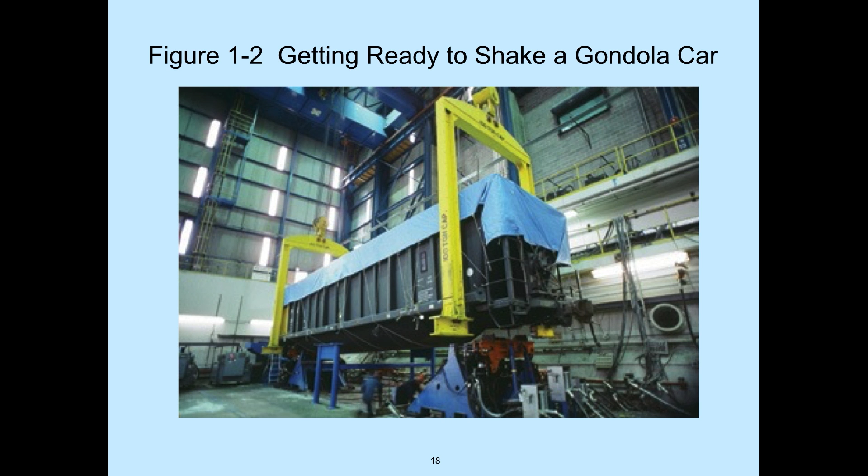So eventually we got away from steam and went to diesel. We didn't have to stop for watering. Much higher velocities, much better ratio of force to mass as locomotives went to diesel electrics. Here we see a test lab. People are simulating on rolling equipment what that rolling equipment would eventually experience on the track.

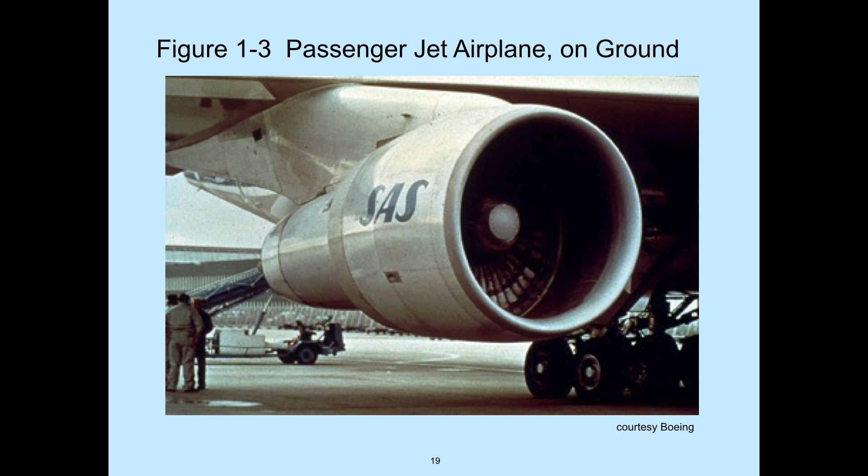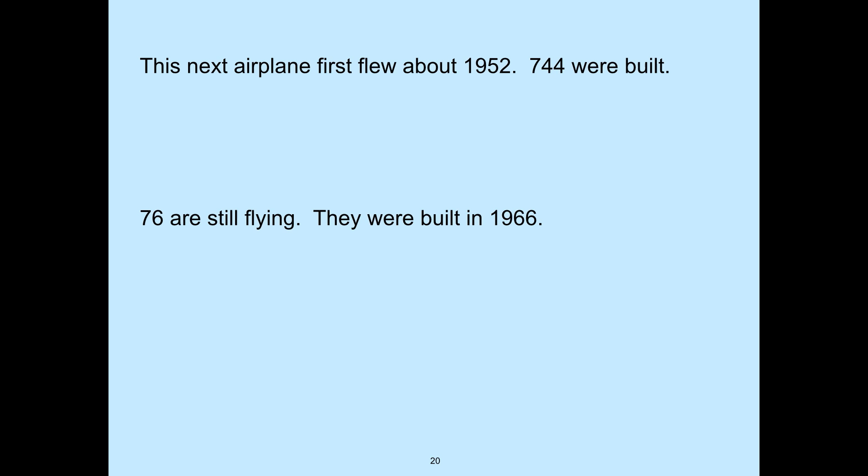But the real interest in vibration came with the air age. Aircraft vibrations are very definitely of concern. This next airplane that I'm going to show you first flew about 1952, and 744 of them were built. 76 of them are still flying, and those were built about 1966. And my first vibration experience was on B-52 aircraft, full-scale models of that aircraft.

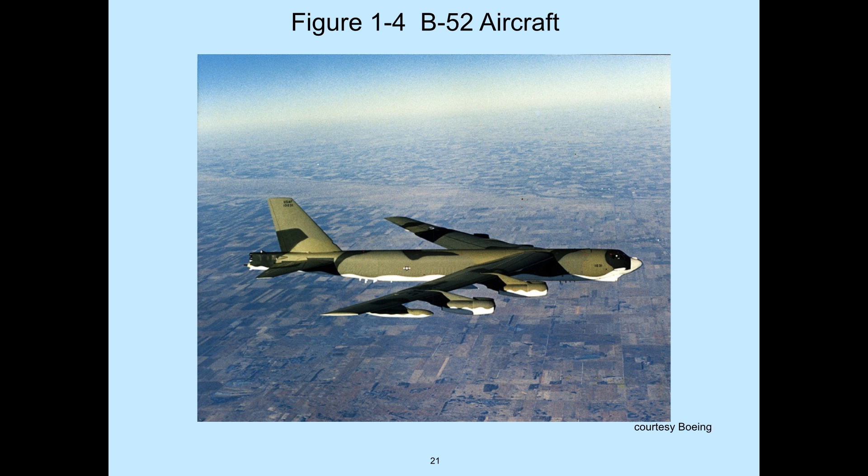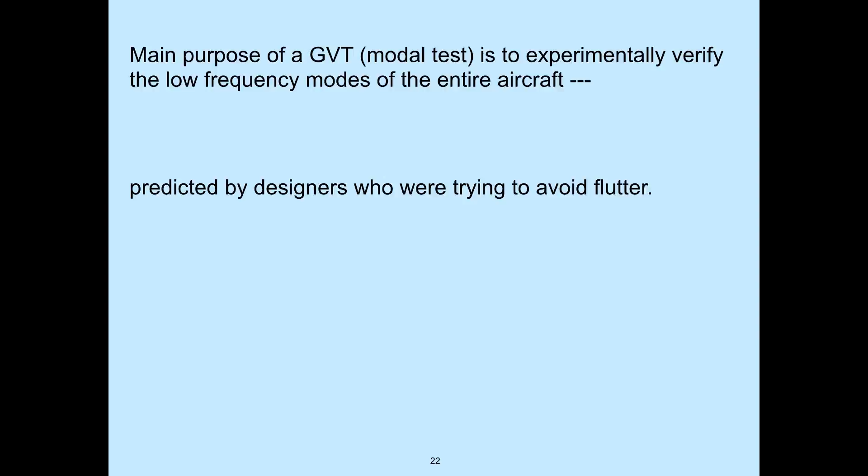We were doing what are called modal tests that we're going to discuss later. The main purpose of that kind of a test was to experimentally verify the natural frequencies that the designers had predicted. Their concern was flutter. They wanted to avoid in-flight flutter. There is currently concern about the switch of aircraft construction from metals to plastics.

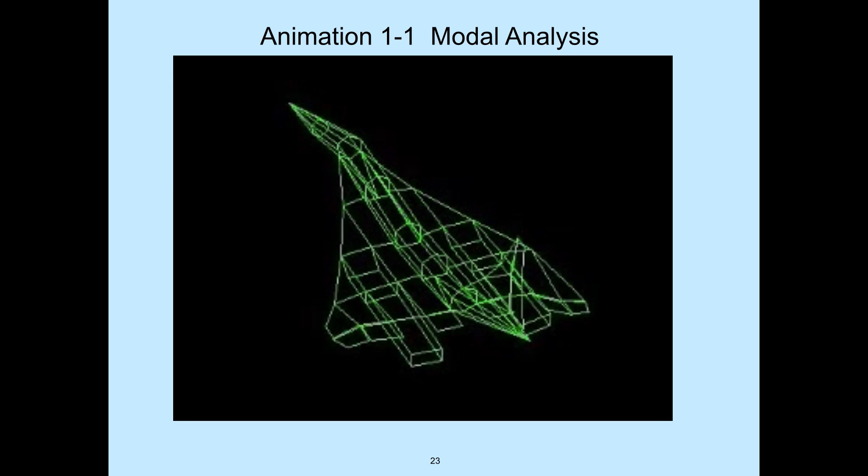And here is an animation of a particular mode, greatly exaggerated. You'll never see anything like this on a real aircraft. The only mode you're likely to ever see as a passenger might be looking out at the wing tips and seeing them move a little bit relative to the body. So this is hugely exaggerated, one of many modes that we're going to look at over the next few hours.

Have any of you ever flown in a helicopter? You've experienced vibration. They definitely shake. The main source is the main rotor blades passing over the cabin. Two rotors, more vibration. Any propeller-driven vehicle, aircraft or ship, is going to generate vibration. And that vibration is something we don't particularly want.

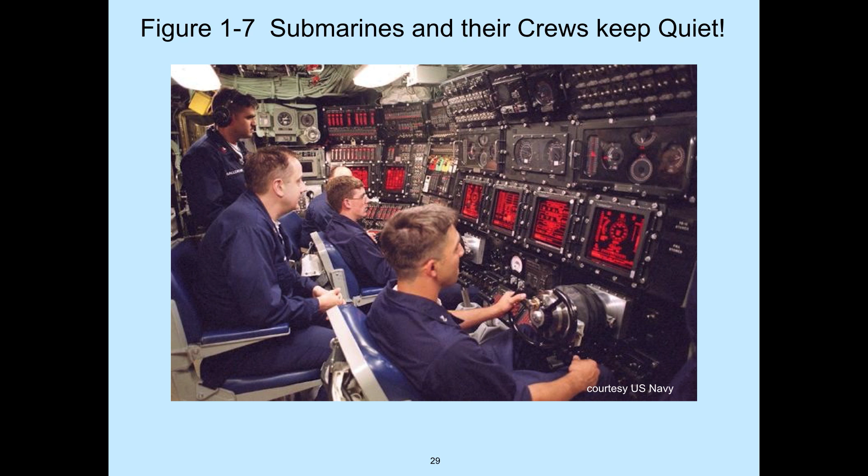It becomes sound, travels through the water, gives away our location, our identity, our speed, and so forth. Especially we're concerned about that if we're the crew of a submarine and the enemy has lowered a sensor to listen to us and identify us. In those circumstances, we want to reduce vibration if we can. Vibrations are measured with accelerometers, which we didn't have at the time I got into this vibration business.

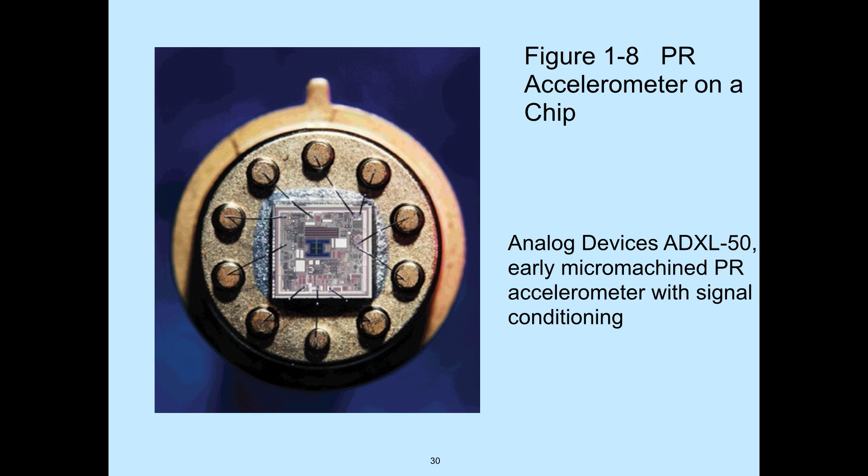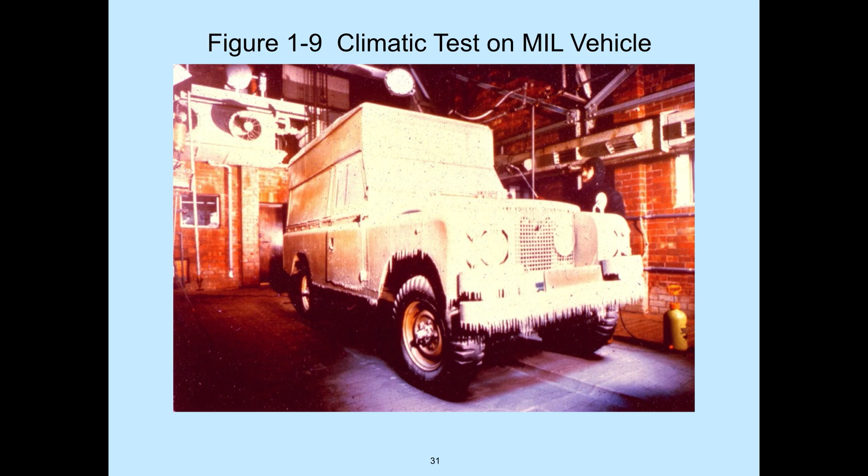I want to say just a few words about climatic environmental testing. It wasn't necessary to take this vehicle to the North Pole to find out if it would survive. Instead, they put it into a chamber and pulled the temperature way down. And that sort of climatic environmental testing is done on equipment. Our focus, however, is going to be on dynamic environmental testing, vibration and shock.

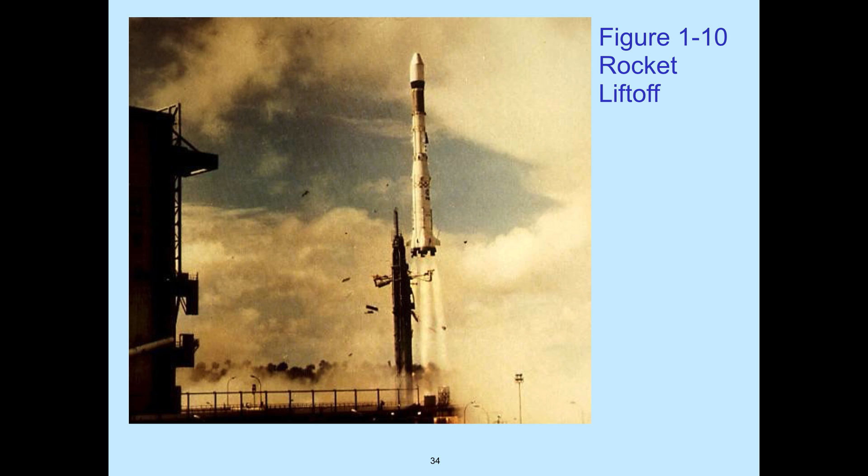At one time, 2 or 3 pieces of hardware were built, one or two for testing and one for flight. But in recent years, in an effort toward economy, they sometimes only build one. And they hand that one piece of hardware to the lab and say, here, test it. But don't break it because we have to fly it next week. Well, that inhibits our testing somewhat.

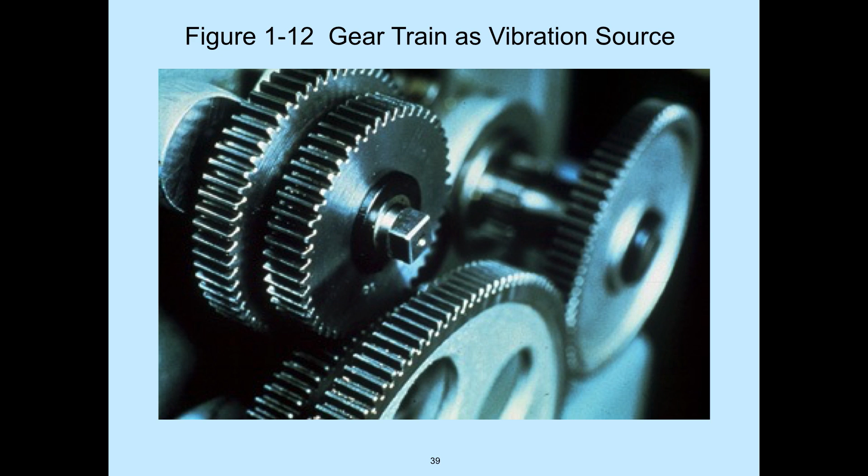Hardware that goes to the military is often used in very strenuous circumstances. It has to be rugged to withstand this kind of an environment. And our hardware, I think you can imagine, can find many ways to fail. And we're going to identify those. One of the sources of vibration on that vehicle might be gear trains.

Each gear turning at a particular speed, and the frequency of that gear's contribution is that RPM multiplied by the number of teeth on the gear.

Some propulsion machine, some sort of an engine firing, is going to create vibration felt throughout the vehicle.

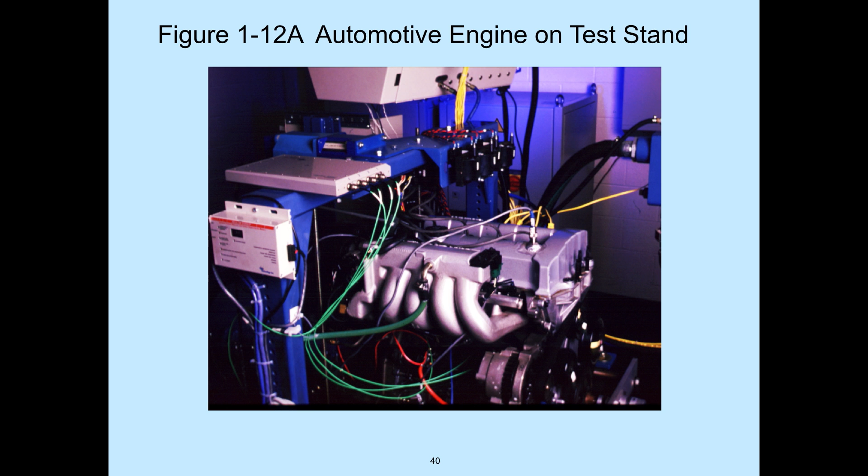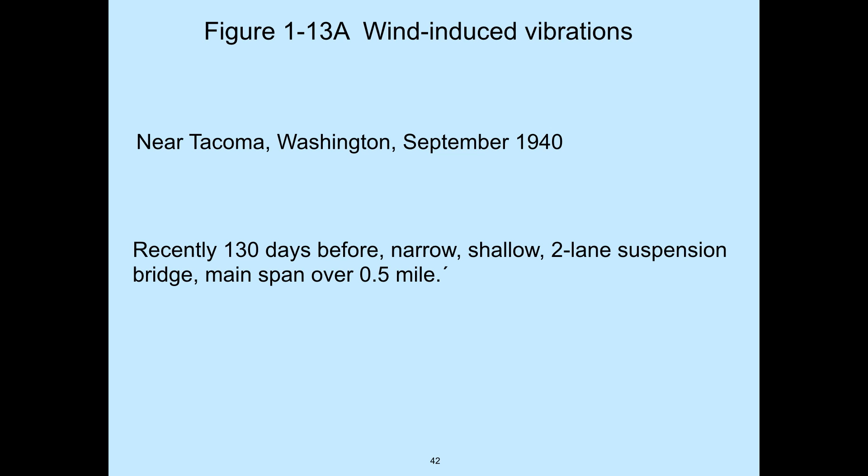Have any of you experienced wind-induced vibration? If you happen to have a sailboat, then you definitely have felt vibration of the hull and the rigging and the sails themselves.

I mentioned wind-induced vibration because in September 1940, near Tacoma, Washington, the Tacoma Narrows Bridge experienced damaging vibration. This video coming up is a classic that civil and structural engineers all study. There we see a distance shot of that bridge flexing in the wind.

It took several hours of a steady wind blowing to come up to that intensity of response. Definite resonant behavior.

I'm guessing, Brett and my audience, that you have some interest in drilling into the earth, drilling for oil, drilling for water. Well, that drilling action, especially through rock, creates vibration. And in certain instances where the smart drill bit is sending information up to the surface, that vibration can be detrimental to that smart drill bit.

So drill bits are vibration tested. Another form of vibration is seismic, earthquakes. A very damaging earthquake took place in the Northridge area of Los Angeles in January 1994.

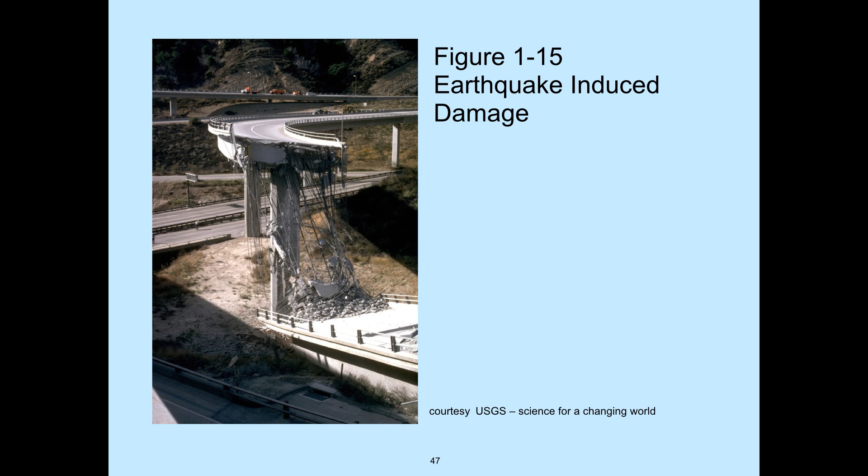This is Interstate Highway 5 near Los Angeles, the bridge over that interstate. Interestingly, the previous bridge had failed at the same location in an earlier earthquake. We're not real sure about the bridge that's there now.

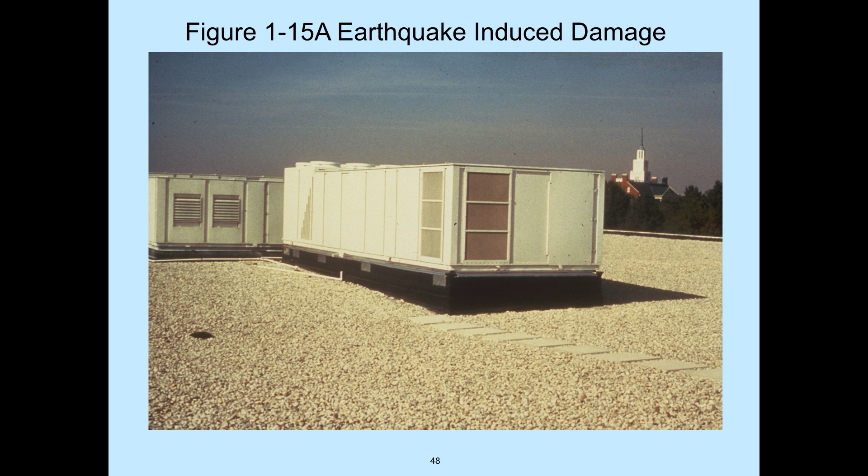Will it survive an earthquake? We don't know for sure until that happens. But there are some seismic vibration tests that are done on equipment to reassure ourselves that our equipment will survive. We're not sure whether this equipment will survive the next earthquake or not until that earthquake happens. But failures do take place, and we are going to talk about seismic vibration testing.

I imagine that each of you has experimented with a paper clip, has bent it back and forth and counted the number of cycles to failure. And then conceivably, you made a stress riser in the wire on another paper clip, and it took fewer cycles to get a failure.

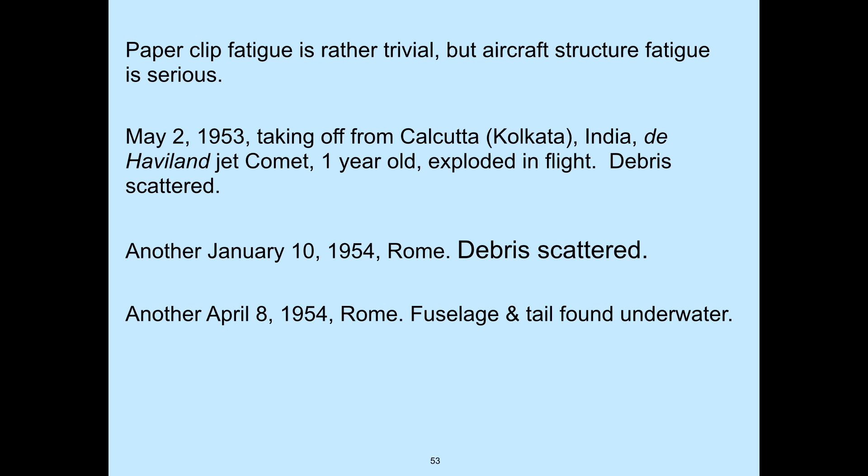Those paperclip fatigue failures were rather trivial compared to some de Havilland aircraft that took off from Calcutta in 1953. One, and then another one from Rome. And in these, the debris was scattered. But a third one took place, and they were able to find the tail and the fuselage underwater. And they discovered that the cabin had exploded.

Now, de Havilland designers had worried about cabin pressurization. They were designed for maybe 20 pounds per square inch. And the labs had performed static tests out to 16.5 psi on every aircraft.

But after those 3 disasters, then they did some cyclic pressure tests, and they found a corner of a cabin window cracked, and the crack spread rapidly. That failure led to reinforcing that area on future aircraft, starting with Comet 4.

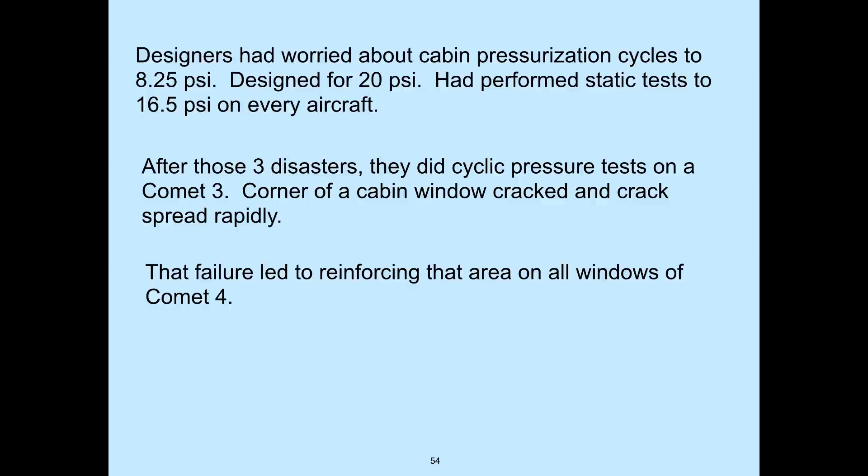That aircraft had had over 75,000 pressure cycles, takeoffs and landings, very short flights among the islands in Hawaii. And the investigators looking at that aircraft found corrosion. They found epoxy had debonded.

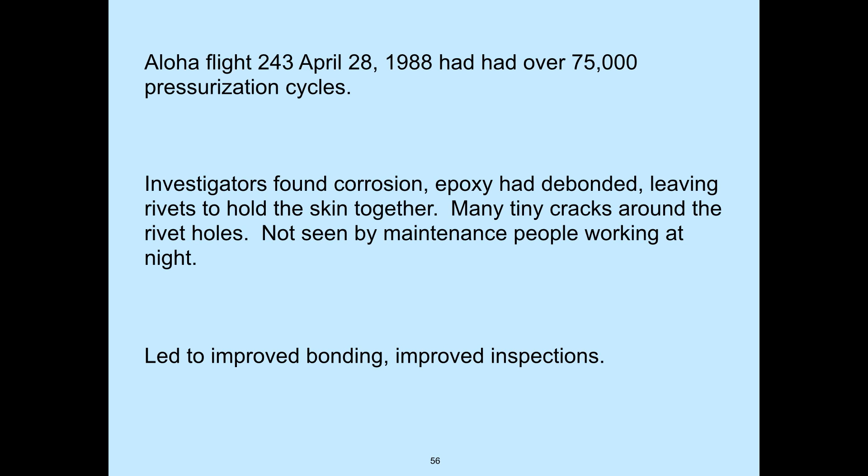These troubles hadn't been seen by maintenance personnel working at night with flashlights. But this led to improved bonding and improved inspections. Currently, a number of aircraft are wearing out and should be replaced.

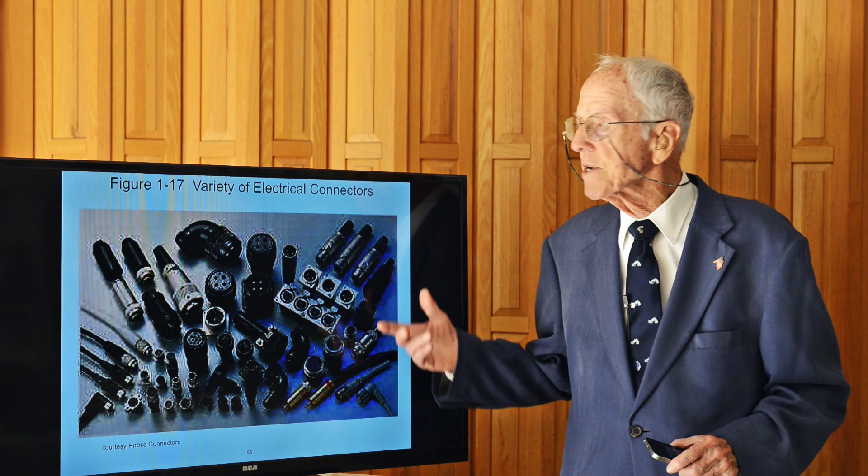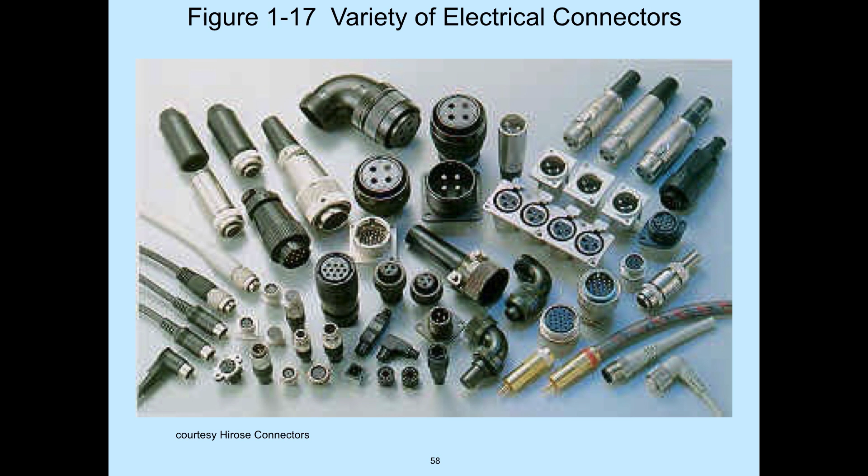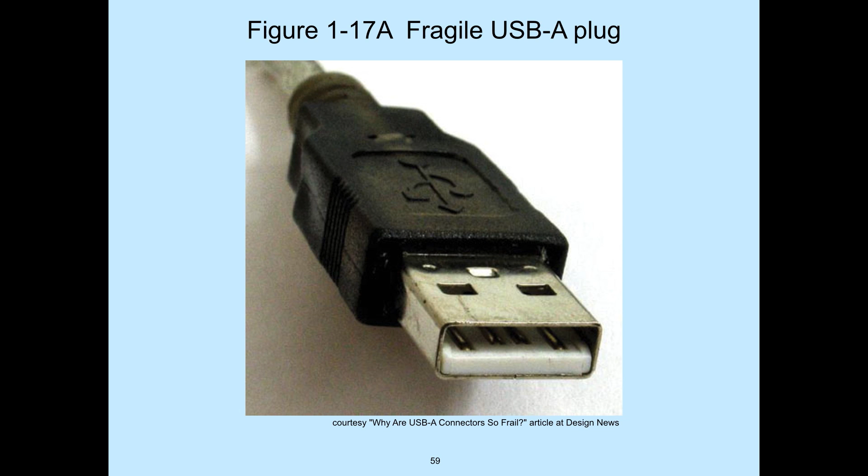Let's change the subject and talk about electrical connectors. They're supposed to be zero resistance, 100% conductivity, and they are, but under vibration sometimes they open momentarily, and that opening can badly affect downstream electronics. So we are concerned about those, and we do vibration tests on connectors using a shaker and electronics monitoring of circuitry. We've found that these USB connectors are very intermittent.

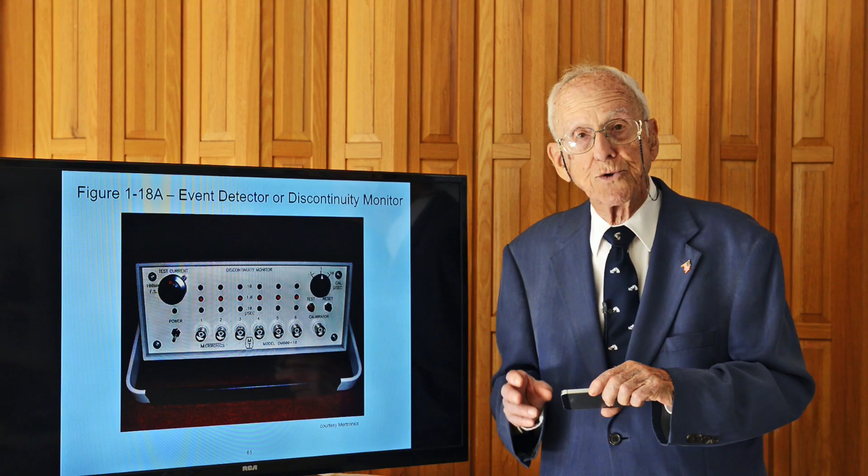We have military-type connectors that can stand up under vibration inputs. There are standards for such tests, and electronic devices for monitoring the contacts to make sure they don't open. If they do open, it is recorded.

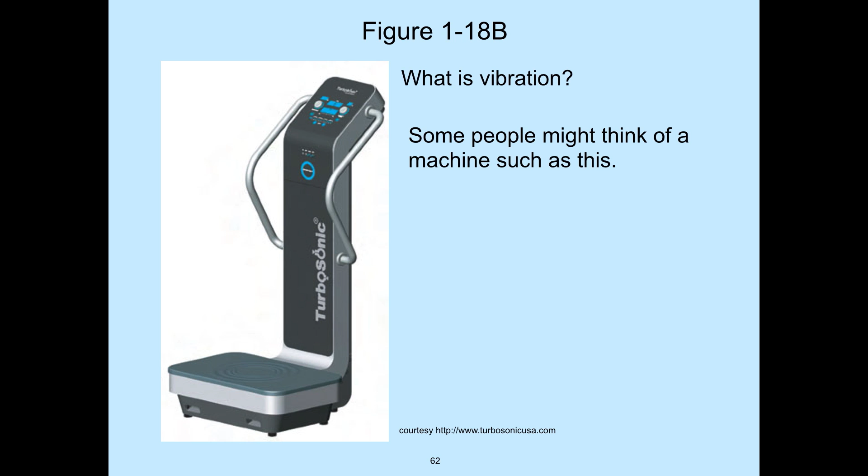What is vibration? It's kind of hard to describe, but referring to your gymnasium and machinery like that, almost everybody understands what you're talking about. Webster gives us a definition, one line of which is useful: this periodic motion of the particles of an elastic body and so forth. That's a good definition for some of our work—okay when we're talking about sinusoidal vibration, but it doesn't fit when we're talking about random vibration, an important subject for these few hours together.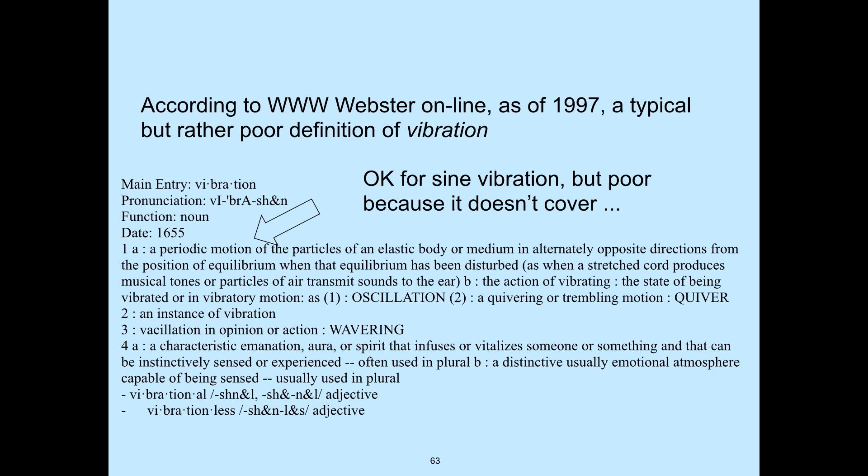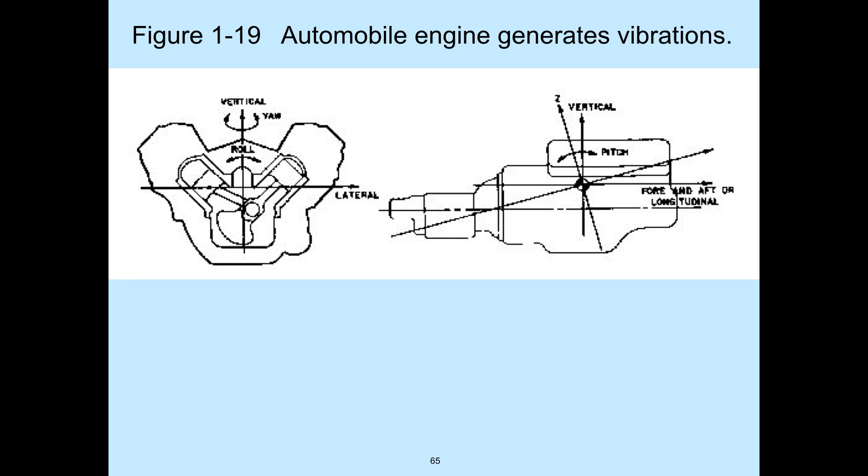Let's imagine that this automobile in which we're riding has been instrumented. Three accelerometers have been placed on the suspension, and they're recording vibration as we go along. What do those records look like? We'll examine them in a minute. But part of the vibration they're recording is from the engine and the drivetrain. That dictionary definition applies to this contribution, but it doesn't apply very well to the road inputs.

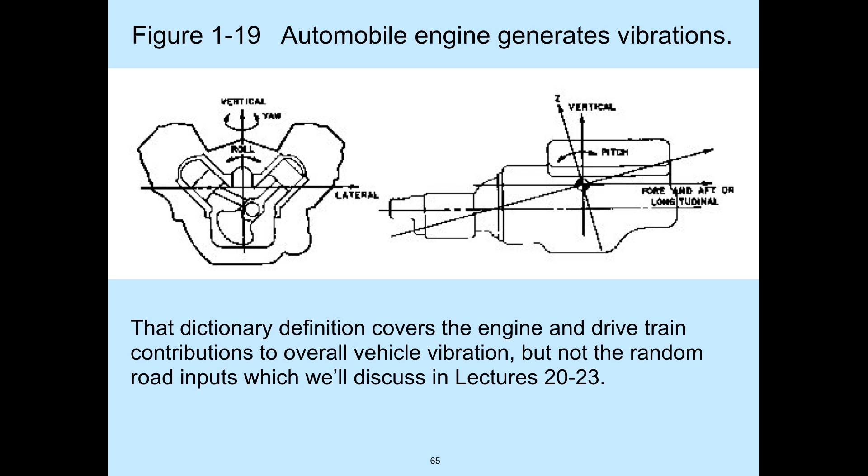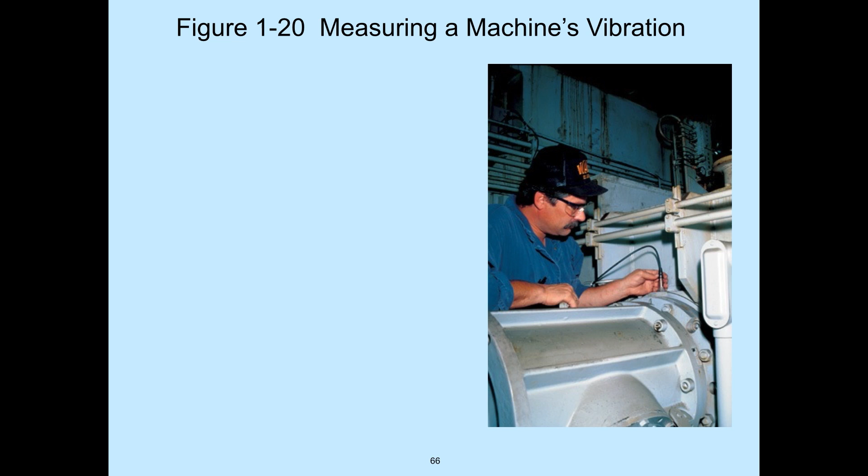Another use for measuring vibration is diagnosing difficulties inside machines. The vibration signature changes when some part wears or breaks. This technician is comparing today's spectrum with a spectrum taken when the machine was new, to predict what has gone wrong inside the machine. That dictionary definition applies to this vibration very well.

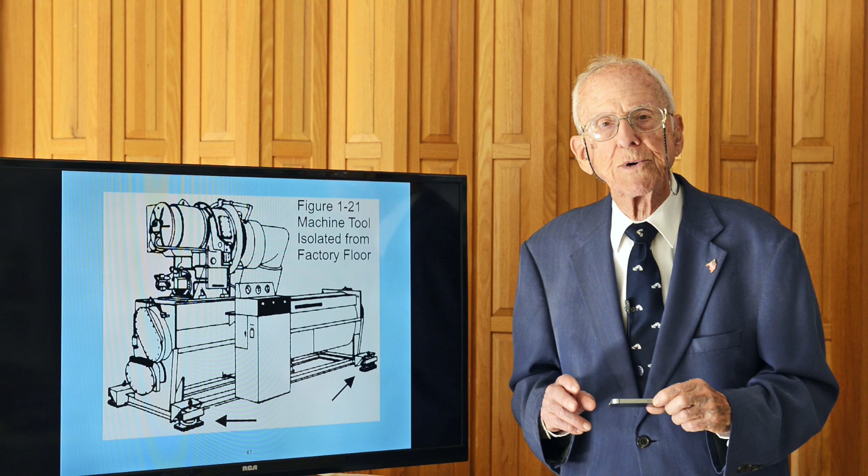Machinery in your factory is probably isolated from the building so that the machine's vibration doesn't affect the building, or the building's vibration doesn't affect the machine. So we are going to talk about vibration isolation under machinery.

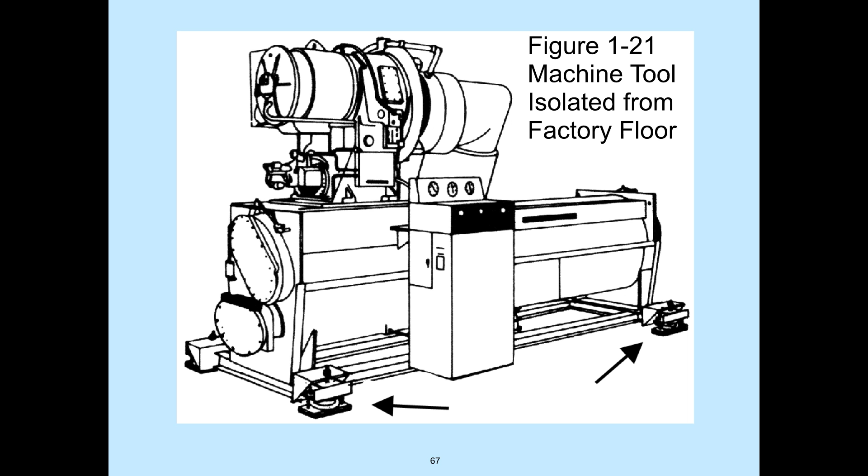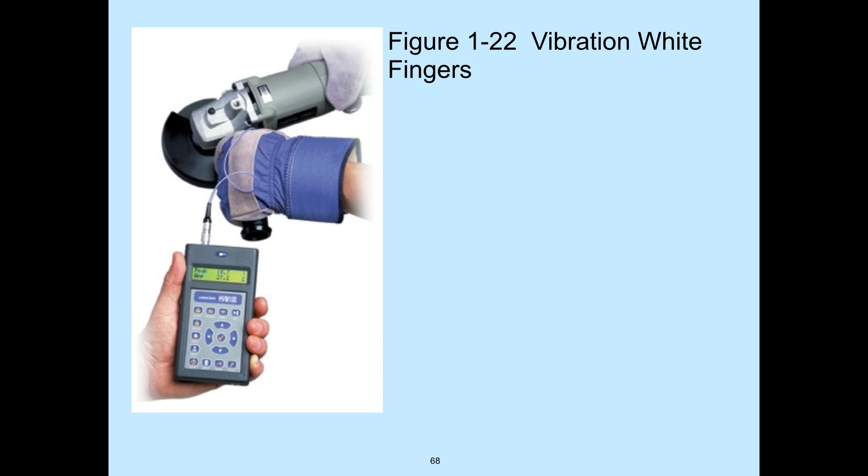Vibration sometimes affects human operators. Gripping a machine tool can be damaging to the fingers, hands, and forearms, especially if we're doing this in a cold situation. That's why the operator is wearing gloves, to keep his hands warm—and those probably are cushioned gloves to protect his hand from the tool's vibration. That vibration can damage immediately and can lead to poor circulation and eventually gangrene and the need for amputation.

Remember this, please, later when we're talking about shakers at NIOSH, the National Institute for Occupational Safety and Health. They are concerned about hand-arm vibration. Let's go back and talk a little bit more about machinery vibration, the measurement and analysis.

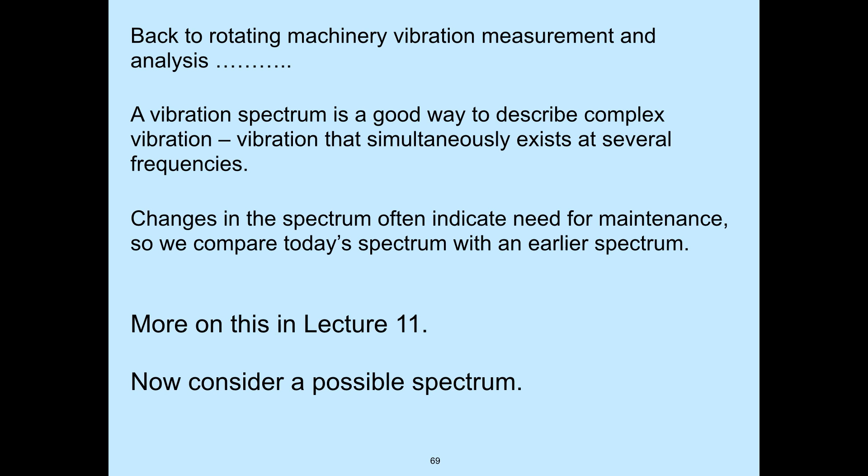A vibration spectrum is a good way to describe complex vibration, vibration that simultaneously exists at several frequencies. Changes in that spectrum are what the investigator is looking for. We'll talk about this considerably more in Lecture 11. But let's consider a possible spectrum.

The vibration, as you can see, is focused on about 15, 30, and perhaps 56 hertz. There's a severe vibration at those three frequencies. There's also vibration at other specific frequencies, but those are down in the noise region, and they are very hard to measure.

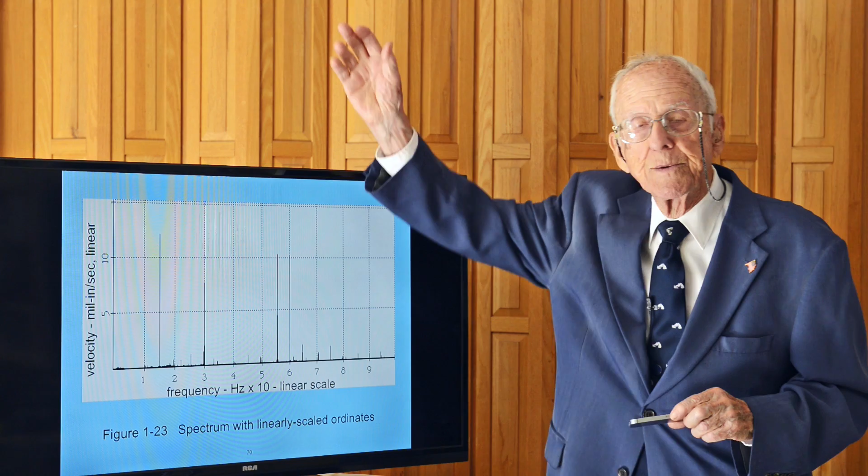How could we get them to be bigger and easier to measure without driving the big contributors clear off the page? Well, instead of using linear scaling—0, 5, 10, 15 mil-inches per second—let's use logarithmic scaling. So now we're looking at logarithmic scaling of velocity. The big ones haven't gone off scale, but the small ones are larger and can be measured. We are going to talk about logarithmic scaling.

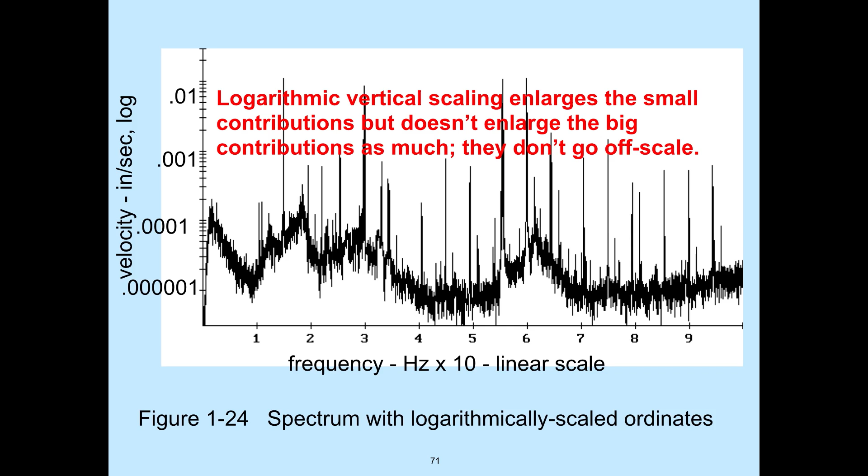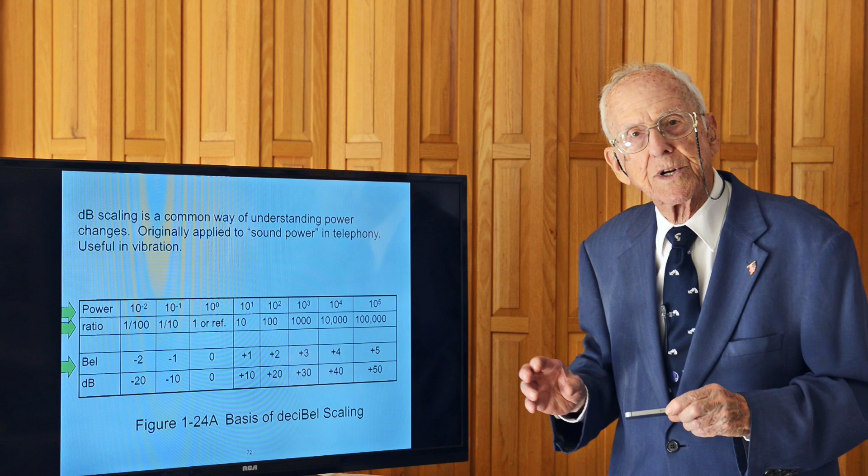This dB scaling got started with sound power measurements in telephony, and it's useful in vibration because we have small quantities and large quantities that we have to measure. Primarily we're talking about power, the top line, and ratios between different power measurements, the second line. Before dB, investigators talked about the Bel, named in honor of Alexander Graham Bell. The number of bels is really the exponent on the power line, and it turned out that the Bel is too large a unit, impractically large. So investigators cut the bels into 10 parts and started talking about decibels.

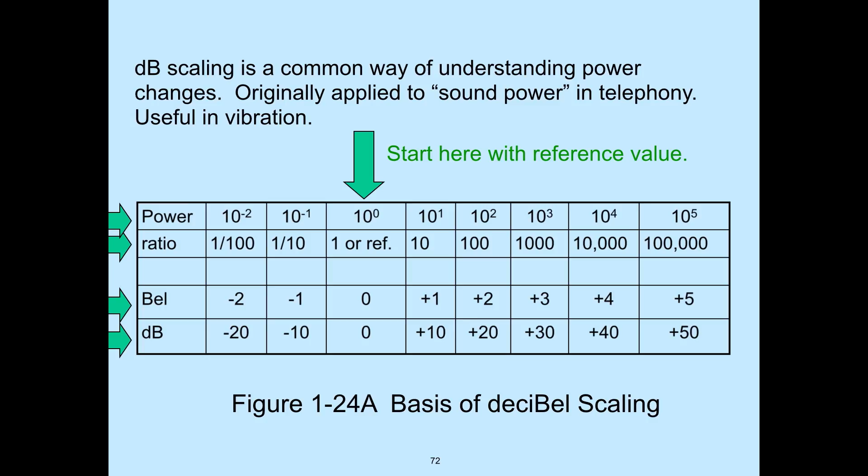Let's start here at unity, 10 to the 0 power, 0 dB. The original classic relationship in decibel scaling is coming up—please write this down somewhere. The number of decibels is equal to 10 times the log to the base 10 of a power ratio, some new power value being compared with an original power value.

Power is proportional to voltage squared, but maybe not everyone in the audience agrees with this statement. Perhaps we'd better run an experiment to make sure everyone understands that power is proportional to voltage squared.

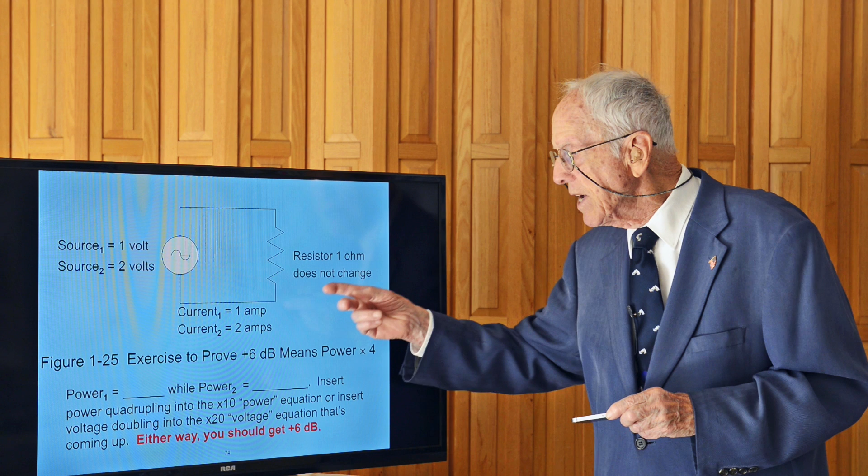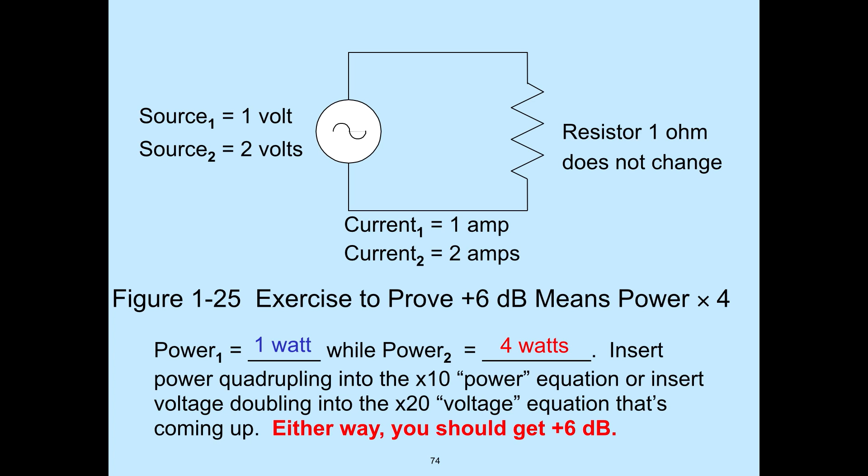Let's apply 1 volt to a 1 ohm resistor and have a current of 1 amp. The power in that situation, I hope you said, is 1 watt. Now let's double the voltage and push 2 amperes through that resistor. The new power value, I hope you're calculating, is 4 watts. That proves to us that power is proportional to voltage squared.

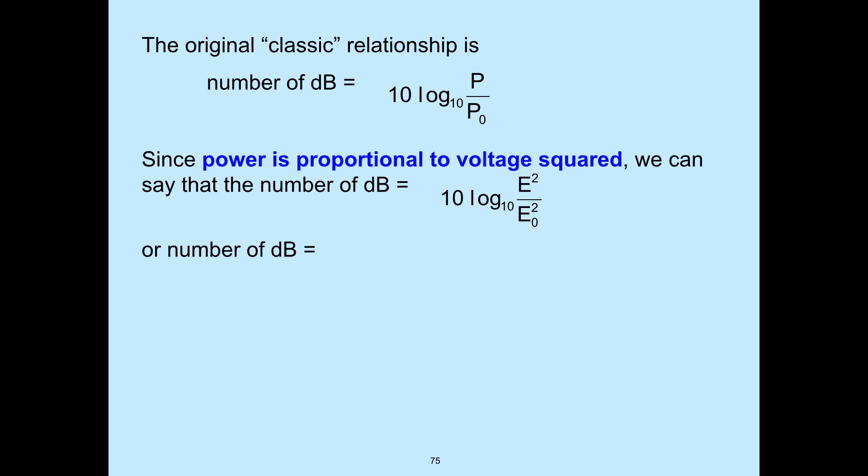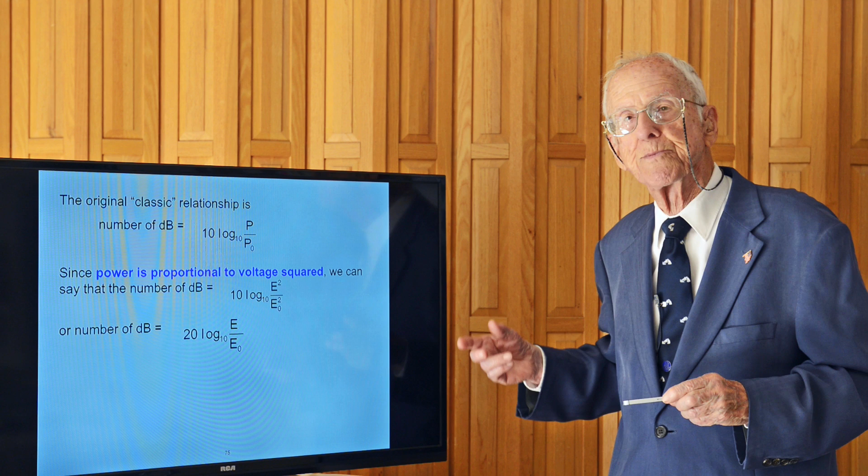So we take that original equation and modify it for situations where we're measuring voltage, and we square that voltage, or we can say that the number of dB is 20 times the log of the voltage ratio. You're going to use whichever one of these equations fits, depending on whether you're making power measurements or voltage measurements.

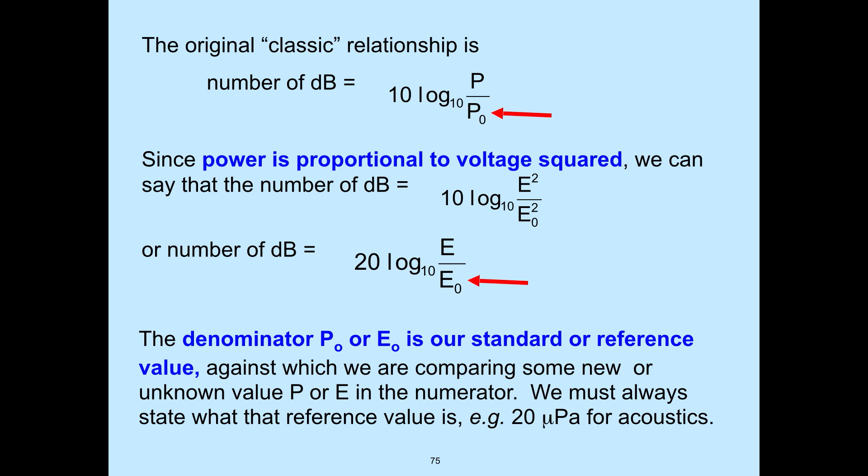In any event, you're going to pay attention to the original quantity. I call that P0 or E0, and we're going to compare new values with those classical values. Sometime when you were in school, I'll bet you saw a chart like this, with a number of decibels down the center, and 2 adjacent columns with power ratios, and the outside columns with voltage ratios.

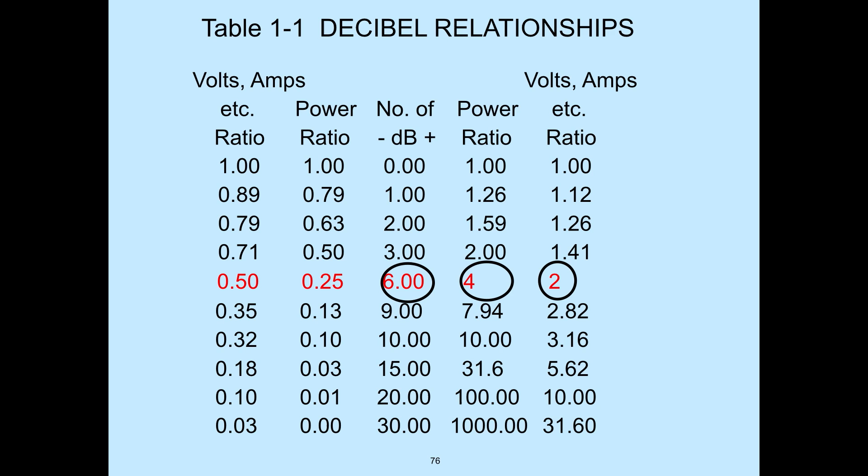A moment ago, we talked about doubling the voltage, quadrupling the power. That situation is called an increase of 6 dB. And we talk about quartering or halving a voltage or a current as a negative 6 dB. I presume this is somewhat familiar to everybody.

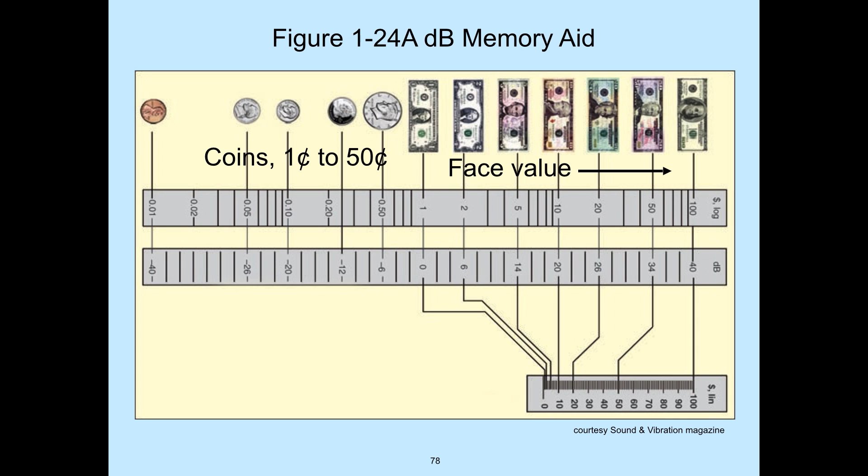A little story in Sound and Vibration magazine a few years ago likened this to doubling your money, from 1 cent to 2 cents, from $1 to $2, and so forth. Those dimensions on this scale could be called 6 dB. The face value changes, but they're all the same thickness. So doubling your money on the upper scale, each of these arrows could be labeled 6 dB.

I have a voltmeter at home. On the scale, a distance of 6 dB measures a doubling of voltage.

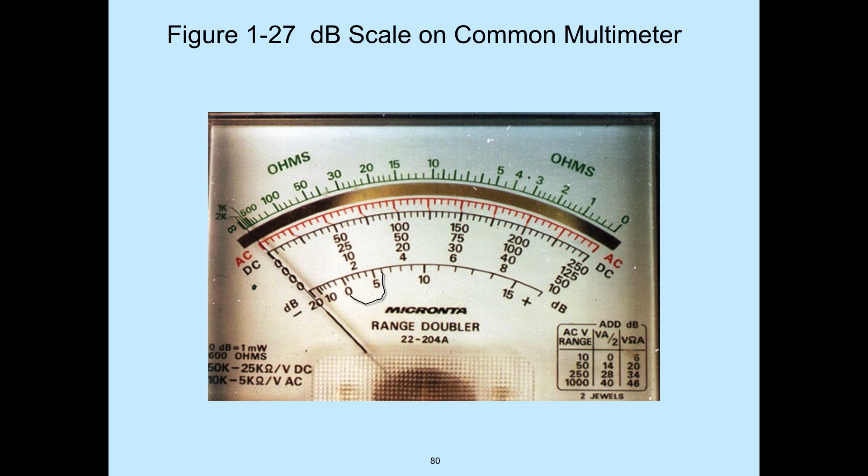Decibel scaling certainly is used in acoustics work, but we're going to find it useful in vibration work also, because we go from such a small fraction of a G sometimes to thousands of G intensity of vibration. Decibel scaling is very useful.

What about shock measurements and shock testing? Well, let's talk about those also, but let's put them off to about lecture 28. Your slice of the world of vibration may be this little bit here, but I think you'll be a little bit interested in some of the other activities in the world of vibration, and we're going to talk about a few.

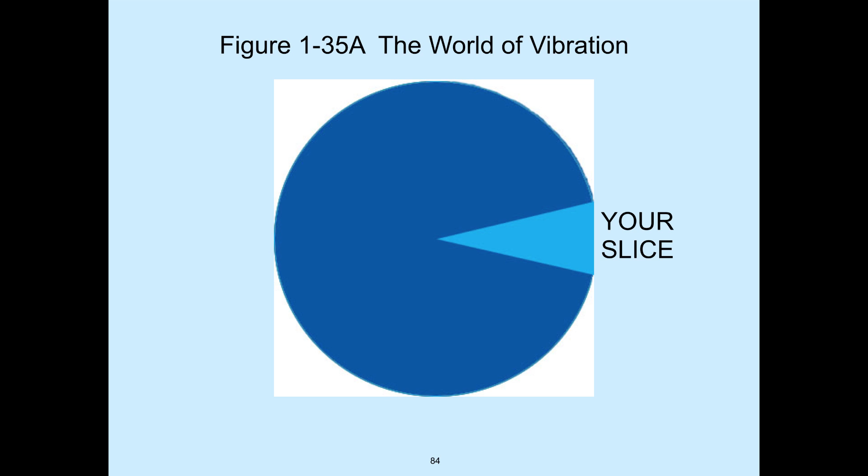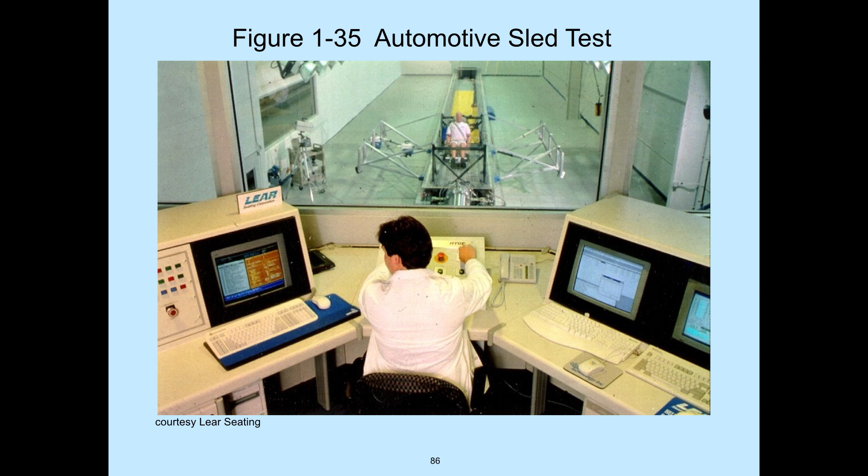In about lecture 28, we're going to talk about automotive testing. And that sled there, the dummy occupant, is going to behave very much the same under test, being yanked backward severely, as if he came forward and stopped abruptly.

A design engineer in a course I was teaching on site, perhaps there were 14 designers and 4 lab people, said to me in class something like, 'Lab details don't concern me.' And I kind of jumped on him, because I think lab details do concern designers. They should be going to the lab and witnessing their own tests and asking questions about what's happening.

Okay, and now a little video clip, a practical example of reliability.